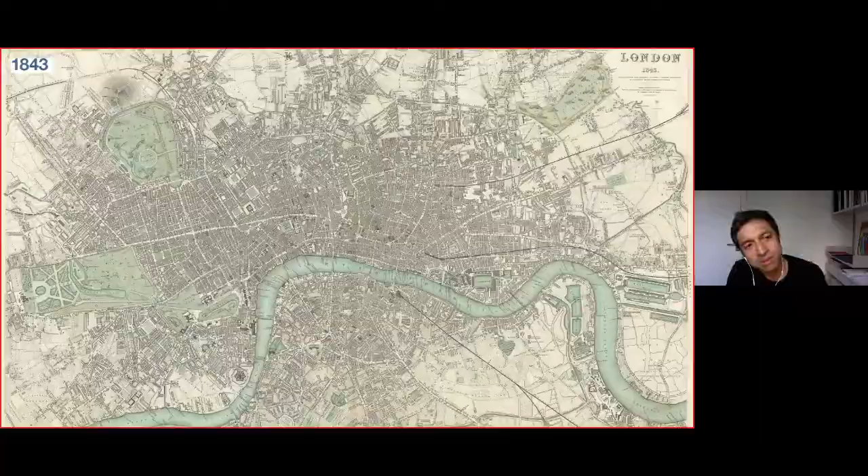Next slide. And historically, London's sewers were essentially rivers that existed in London, which were built over. And there was a network of sewers that would run all the way to the Thames. And essentially what was happening was that all the sewage was then dumped into the River Thames. And the Thames isn't actually a river, it's an estuary, which is double tidal. But it got to the point where even the Thames couldn't really take that amount of sewage based on the growth of the city. Next slide.

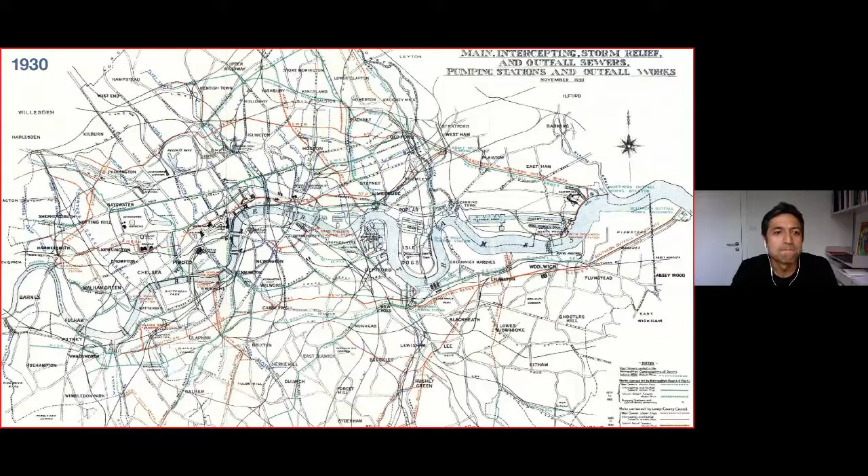And that was when the Great Stink, this was in July 1858, and this is when the Parliament, I think, realised that the stench within the Thames outside Westminster was so unbearable that they commissioned the Thames sewer, the original Thames sewer. Next slide.

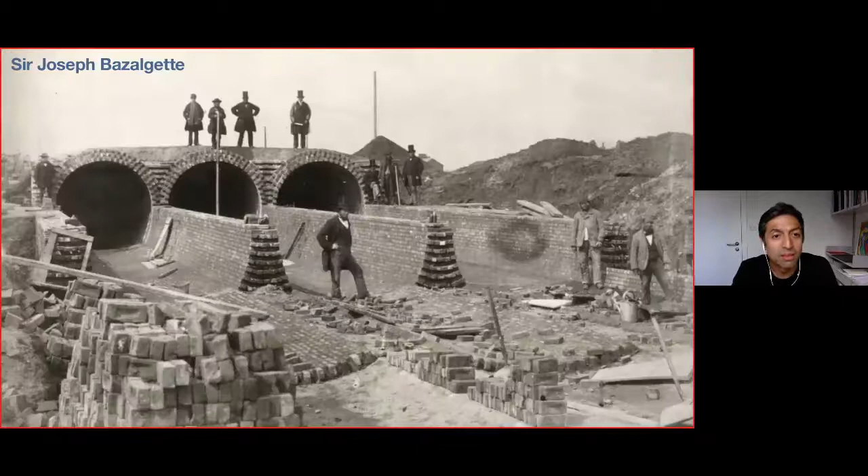And this was Bazalgette. Bazalgette's there in the foreground, and he's doing that stance that all the engineers of that era did at the time, Brunel as well. And these were some of the tunnel profiles that he designed and developed, which were some of the first of their kind. If you go to the next slide.

And what they did was, at the time, the engineers actually designed not just round circular sections, but also ovoids and arches. And that was to increase the flow of sewage and effluent within those profiles. And they were the first of their kind. And so what is beneath our feet is a matrix of various profiles that have been engineered over 170 years ago to enable the flows to be maximized.

And you can see the section at the bottom, which is the Victoria Embankment, which is where he built not only the underground, but also the sewage system, as well as a service area for gas and electric mains. So whilst the embankment was being created and land was being taken and reclaimed from the River Thames, there was this sort of combined infrastructure utility that was being integrated. Next slide.

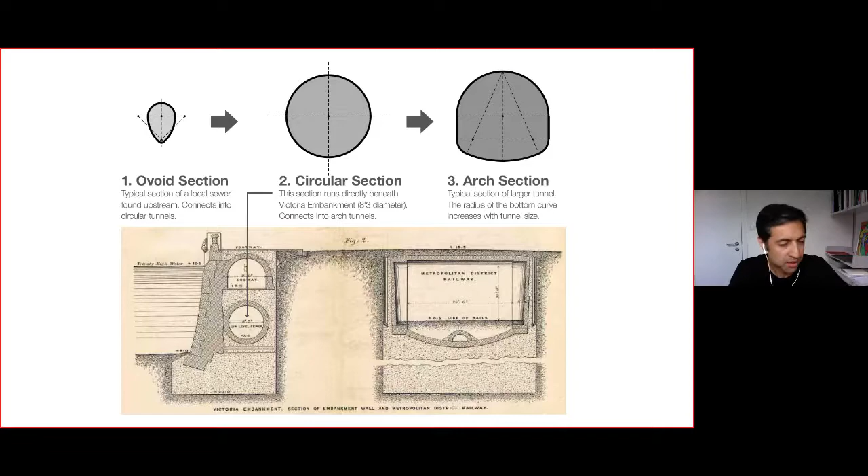Well, currently the problem is this. Each week, 300 untreated Olympic swimming pools overflow into the River Thames. And the reason is that not only have you got an increased population, but we're building on what is essentially porous ground. So when you have the rains like we did today, followed by everybody in London flushing the toilet 2-3 times a day, it overflows a system that Bazalgette designed. And where does it flow into? It flows into the Thames.

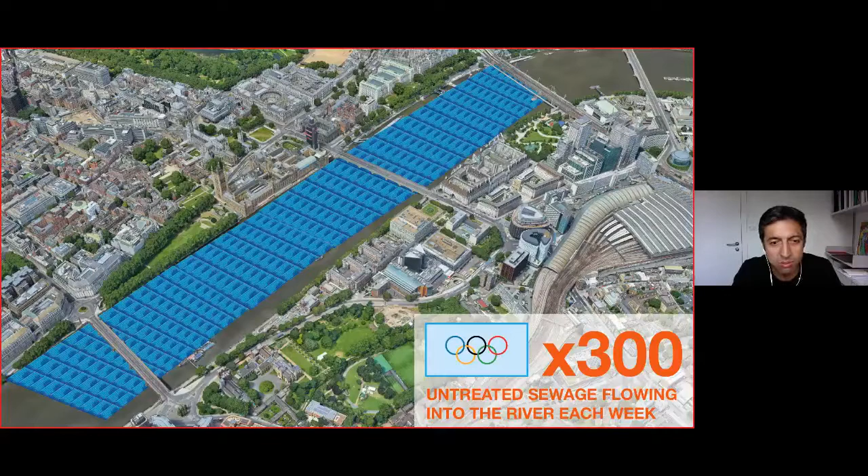So the plan is to now capture that before it gets into the Thames. And when the Thames Tideway is complete in a few years' time, it will only overflow several times a year, making the Thames one of the cleanest rivers, estuaries in Europe. Next slide. So the solution, next slide.

So this is a really simple diagram. So you can see the house there. So when you flush your toilet, it goes into a combined sewer with the surface water. So that's the water that is shed both from the streets and from the roofs. And that goes into a pipe which usually runs down your main road, which then runs into the sewer, which is the Bazalgette sewer. That's the large one that's just underneath the car. And that used to overflow straight into the River Thames.

What we're doing now is we're building shafts which capture that overflow. And then there's a tunnel that runs all the way underneath the Thames, which is a 7-meter diameter tunnel. And that will prevent, when there is demand on the system, overflow into the Thames. Next slide.

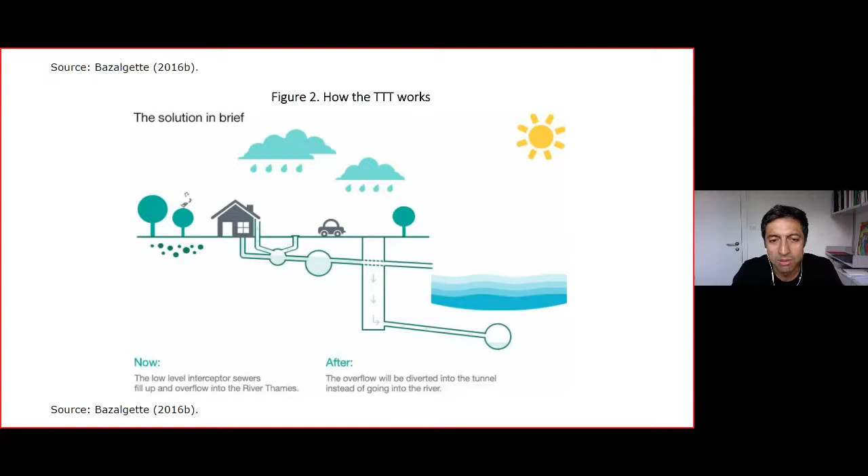And this is what's being created at the moment. Just like with Crossrail, there's a BBC documentary regarding building of the Thames Tideway. So this is very much a combined effort between engineers and contractors, and there's some heroic civil engineering currently being constructed. And the typical diameter of a shaft is 30 meters wide, which then feeds into a 7-meter sewer. Next slide.

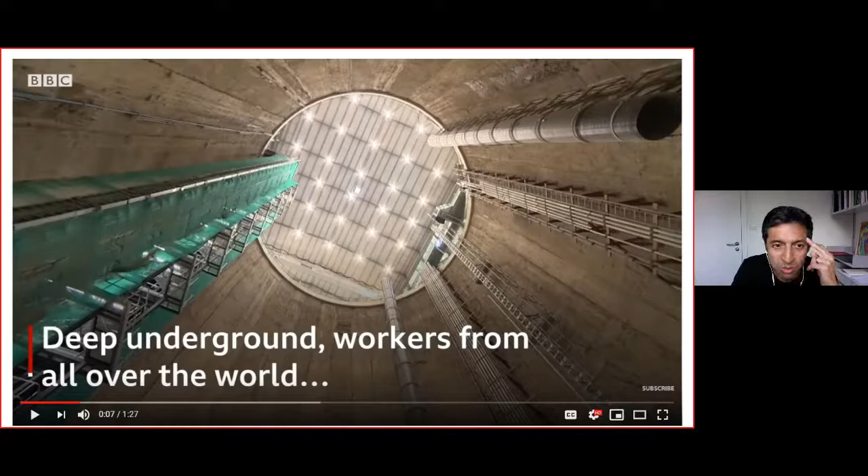And it's gravity. So essentially from Ealing, you've got a 30-meter drop and it runs all the way to a 66-meter drop. And what the engineers are currently doing is tunneling away, and they're building these shafts through a combination of London clay, sand and chalk. But essentially it just flows from west to east. Next slide.

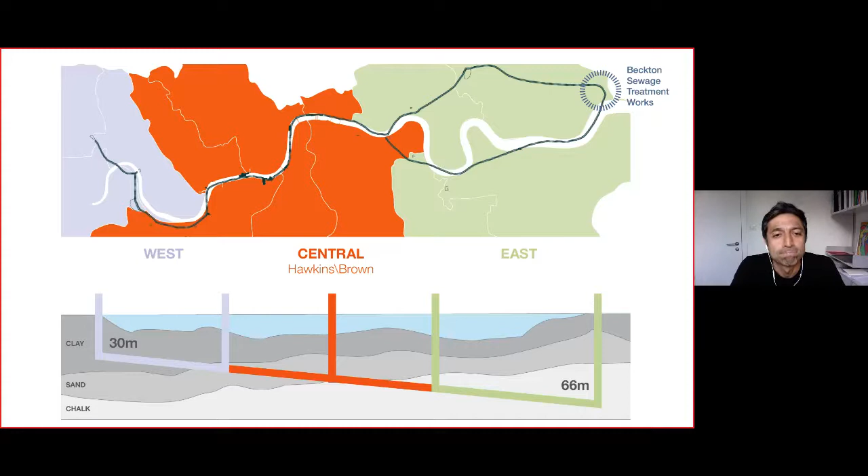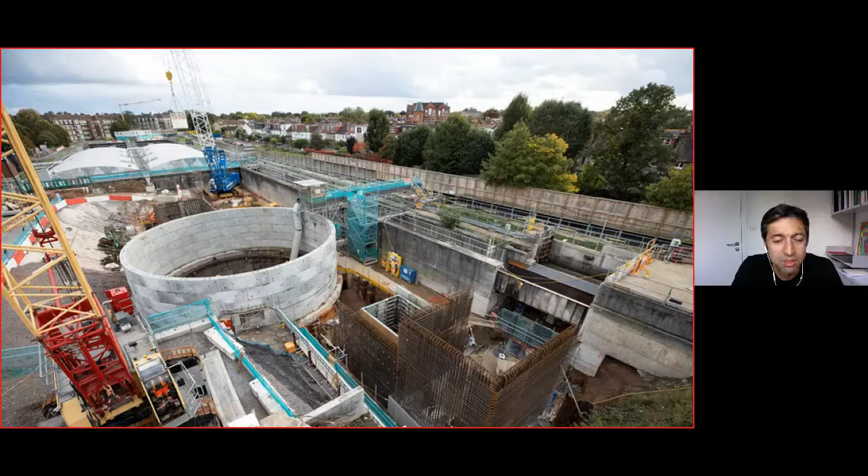And this is the first shaft in Acton, which exists just off the Uxbridge Road. This is where it all starts. So all the surface water, all the sewage from the area gets captured here, stored, and then it flows down. So there's a shaft there, which is typically probably 30 meters deep, and then that runs all the way towards the east. Next slide.

And I was going to talk about one particular, because what they did was that they split the whole of the Tideway project into 3. And what they did in the first instance was do what was known as a development consent order, which essentially is almost like an outline scheme. It's basically setting the form and the location of these sites. And then we were commissioned to develop the designs for construction across the central section. And the central section has 8 sites within 5 different London boroughs.

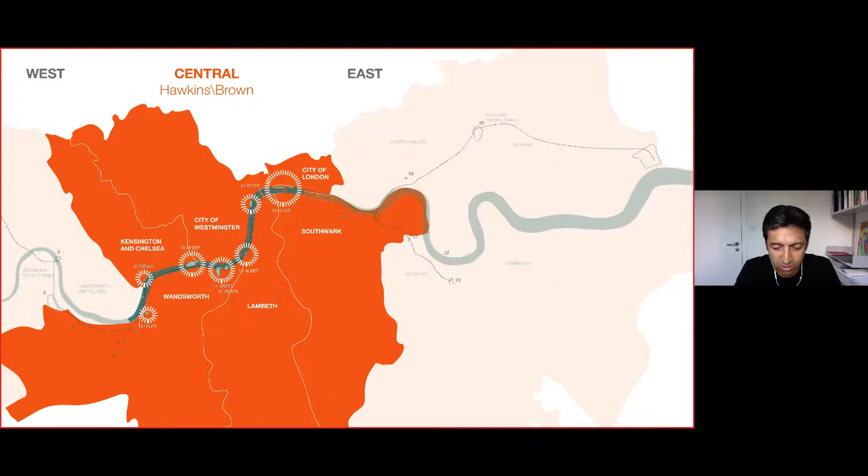And our challenge was to design a site located within the Thames in all these different boroughs with all the different characteristics, submit that, deliver that through planning, as well as developing design that is coordinated with marine engineers, contractors, and a whole raft of multi-stakeholders. Next slide.

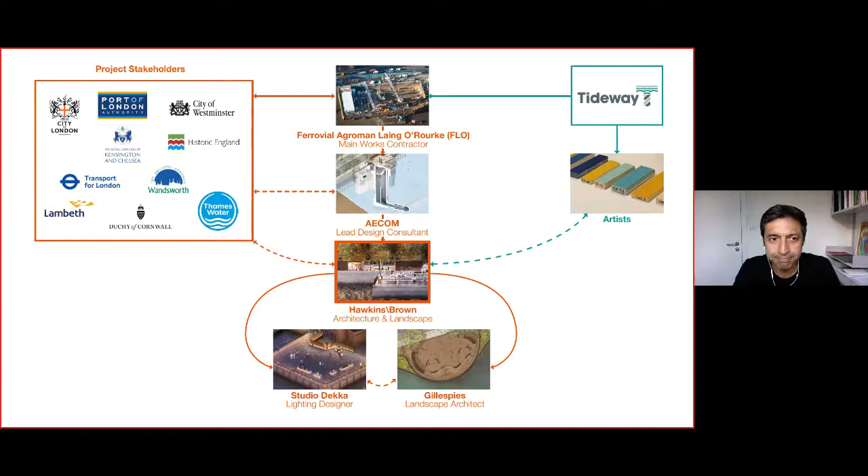And so for anybody who is interested in what it takes to build one of these mega projects, there's a whole team. So it's never designed by one person. For the central section, there's contractor Ferrovial Laing O'Rourke, who's our joint venture. The design engineers are Aecom, we're the lead architects. And then we have Gillespies as landscape architects, and we have a lighting designer, Studio Dekka. But you can see on the left, the project stakeholders, there are many. So it's all the local authorities, as well as the Port of London Authority. And Thames Water are ultimately the client. Next slide.

And we were charged, because we were putting this piece of infrastructure in the Thames, to effectively give it over to the public as a piece of public realm. And so we measured the structures, the public land that we were putting in the Thames. And in the dark orange is that public realm. And you can see in the green, that's Trafalgar Square. So it's quite a considerable amount of new public realm that is being created. Next slide.

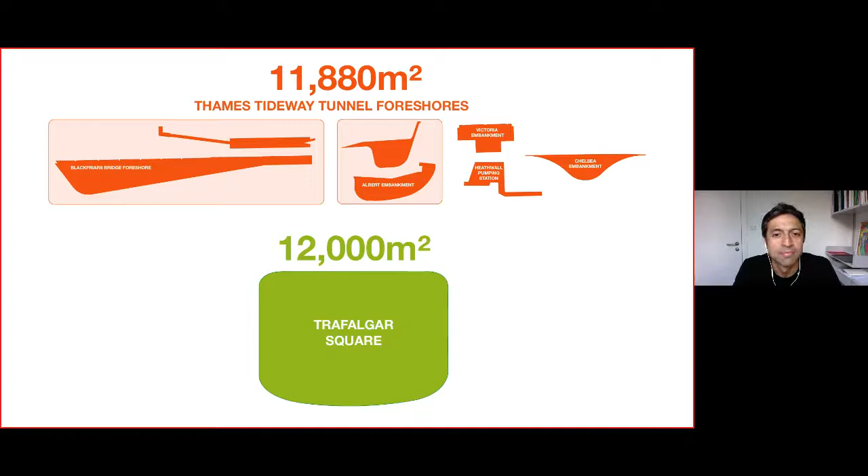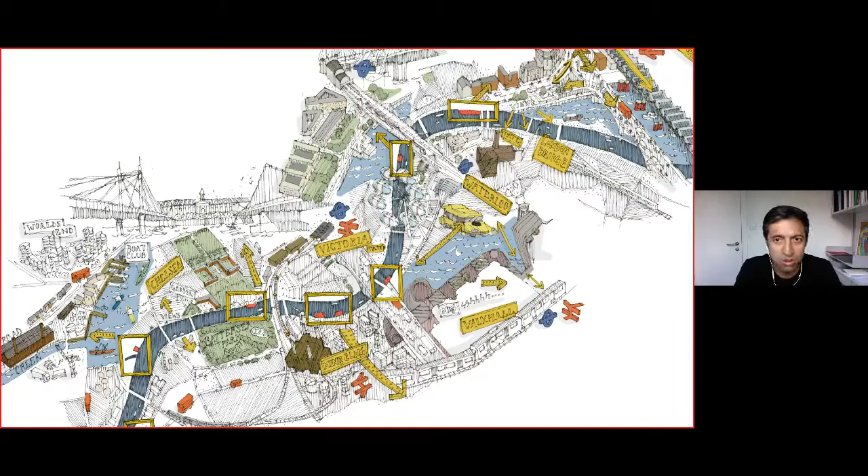And then the first thing that we did was we realised that the Thames has such a rich history. We actually started exploring the different villages which the Thames passed through and what the character was of those areas. And one of the requirements for the project was for us to collaborate with an artist on some in situ artwork for each of the pieces, which we'll be discussing later. So this was really fascinating, unearthing some of the rich history in the various boroughs and what the river was actually used for over so many centuries. Next slide.

And this is a section through what is currently being constructed in the Thames. On the right-hand side there, you see the tube, which is what Bazalgette constructed way back in the 1860s. And then you can see that little semicircle at the top. The semicircle at the top, the small ones, that's the Bazalgette structure underneath the embankment. And what we are currently doing is building that 13-metre shaft, which then feeds into that 7-metre tunnel, which then winds through underneath the River Thames.

And what it does is it picks up the overflow, and then it acts like a little cyclone, and it actually creates a vortex for the water to flow down into the tunnel. And the reason why it does is if you allowed the water just to flow over without the vortex, it would actually eventually crack and crush the concrete below based on the drop. And if you go to the next slide.

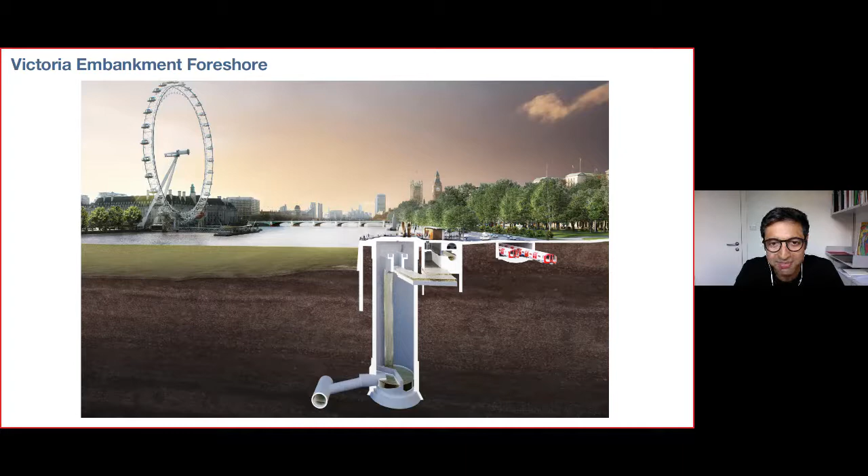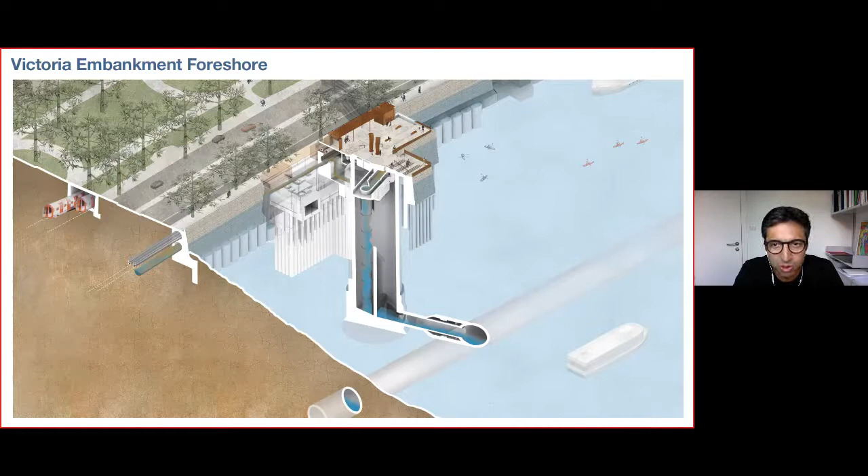And this is what we really had to work with. So underneath the public realm is a whole labyrinth of tunnels and pumps and chambers. And one of the big challenges is the marine civil engineering that is required, because you're creating this whilst you've got a live functioning river. And you've got a historic listed wall that you're creating this new piece of public realm attached to. Next slide.

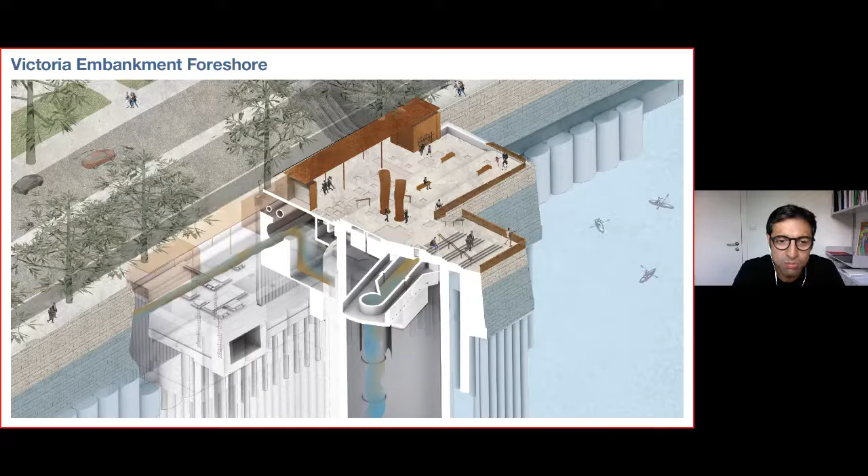And this is a zoomed in view, and you can see those small little chambers. All those chambers that you see, those little squares, those little manhole inspections, need to be serviced 24 hours a day. So our challenge was to create a piece of public realm which was fully accessible 24 hours a day, free to the public, as well as being able to create a space where you could maintain the kit below. Next slide.

Well, they are one of the vent shafts, and you probably may not have noticed them, but actually Bazalgette created lots of little vent shafts from the 1860s, and what they do is allow for air from the sewage system to be dispelled high up into the air. And those vent shafts are internally dressed in carbon. That neutralizes the odors, and that form is generated by the vortex that is created when the water falls into one of the shafts. That's what's generated that form. And here in Westminster, it's going to be cast bronze. Next slide.

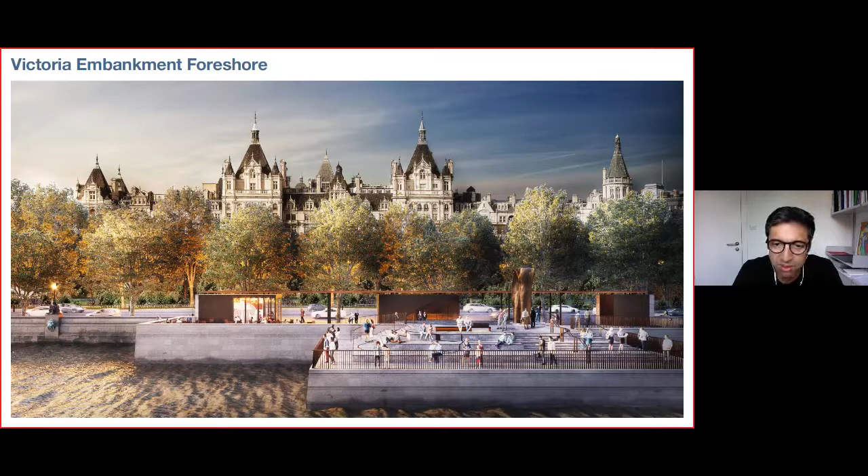And when we designed the pavilions here, because we realized that this was almost like a homage to Bazalgette, we really wanted to celebrate the engineering that he had achieved. And we realized that all of his beautiful tunnels that he had designed were under your feet. You can never see them because you can never access them. So what we did was that we took the sections to scale and we etched them onto the side of the bronze, and you can see them.

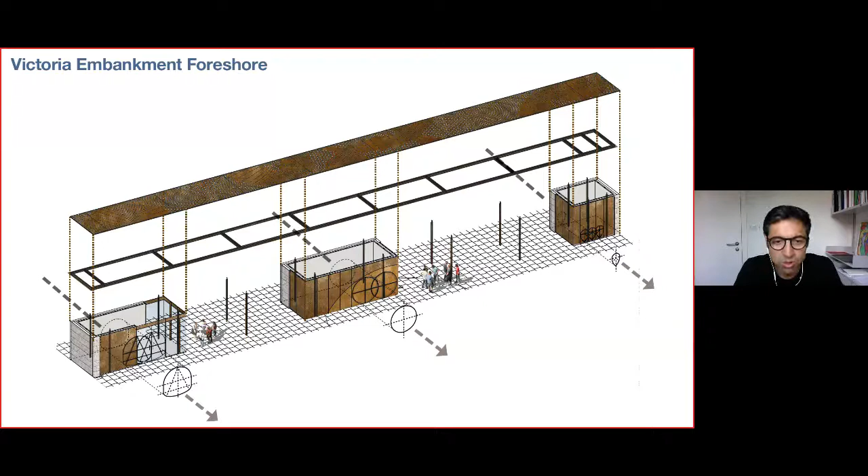You can see the rather bulbous one on the left, and then you've got the circular section, and then you've got the small oval sections on the other ones. And we were very keen for people visiting this site to understand the engineering, the civil engineering that was hidden away beneath their feet. Next slide.

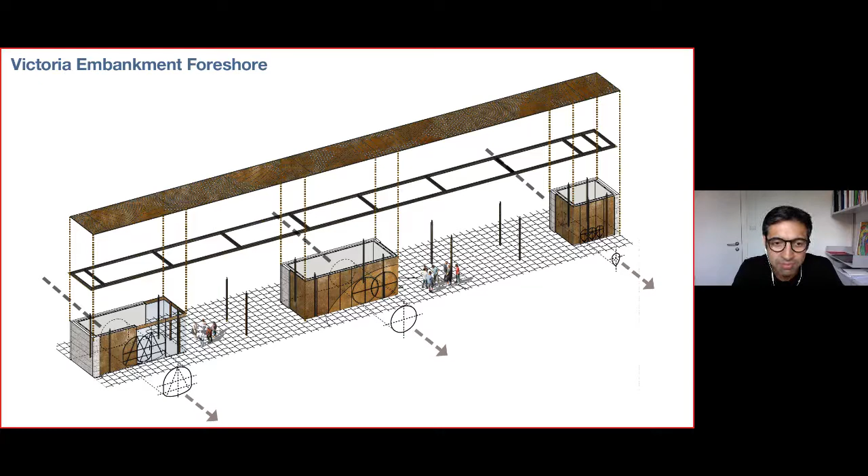And then we wanted to overlay that with the new engineering that we've created for the Thames Tideway project, which again will never be seen because it'll be covered up. And so that large circle in the middle is the 13-metre diameter shaft that the Bazalgette sewer flows into, and the smaller section that you see on the steps is the 7-metre tunnel.

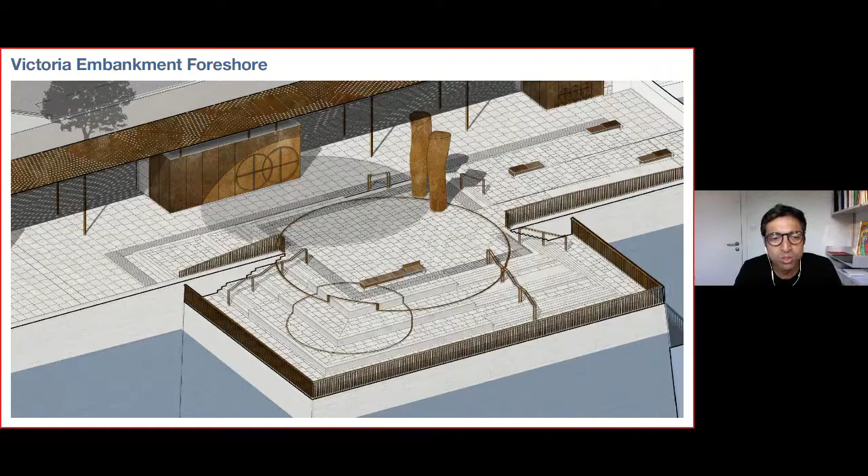So we wanted to overlay and show the old civil engineering, the old tunnel sewage system that was designed for 4 million people, and the new sewage system that is designed for London, which in 10 years' time will be 11.5 million. Next slide.

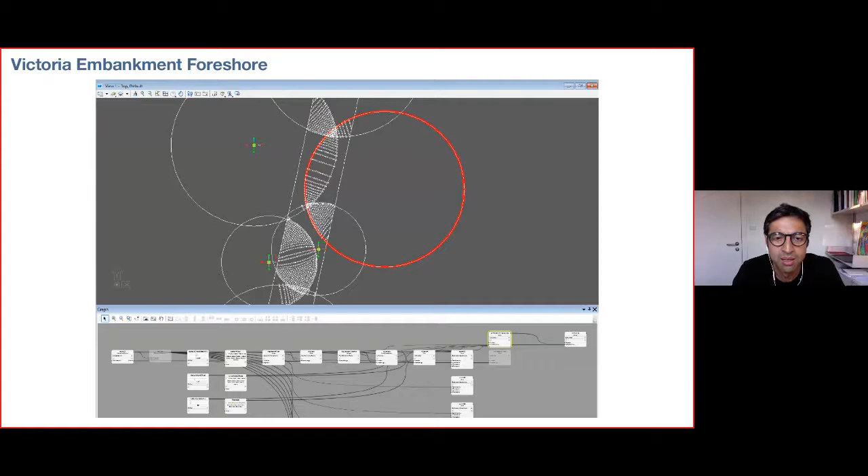And then we were able to do a lot of these geometries because we're using lots of great digital equipment. And so this is us overlaying the 13-metre with the 7-metre tunnel. The reason why we did that using specialist software, if you go to the next slide, is to create an array of perforations, if you go to the next slide, which are digitally cut into a canopy, which is the threshold that you cross when you go from the streets of Westminster into the public realm, which creates this array of light on the floor. Next slide.

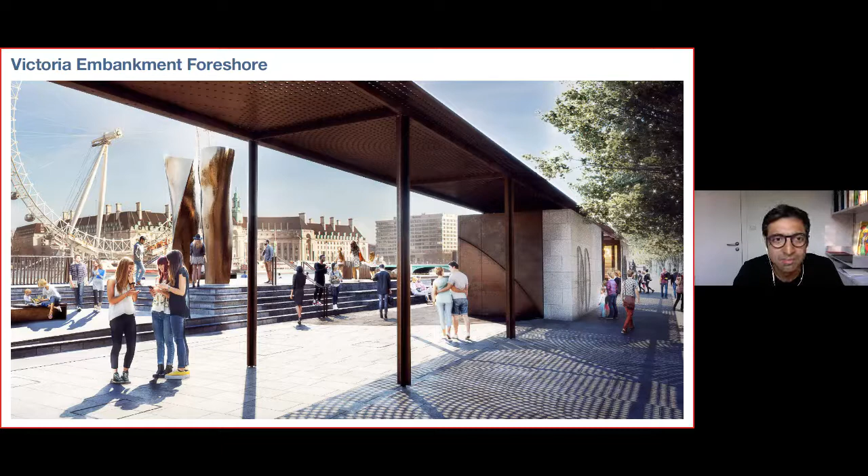And then this is the view from the street. And even on the granite sets that we have, we've carved out the profile. So even if you don't go onto the public realm, you get clues of the infrastructure that was created below. Next slide.

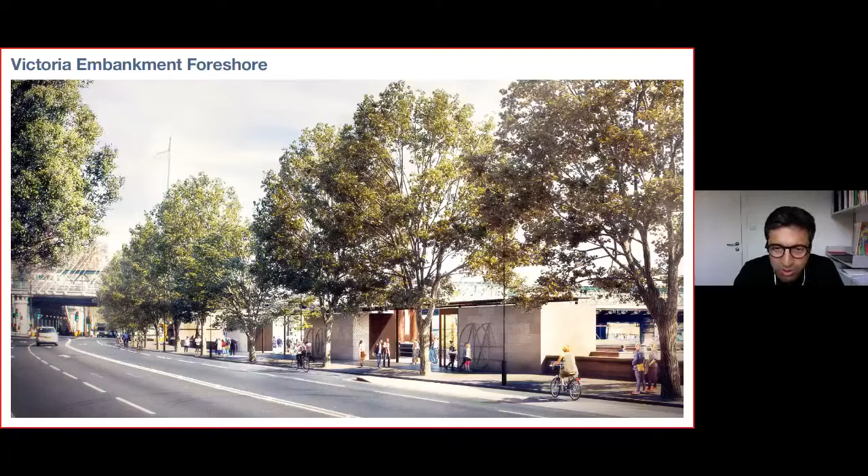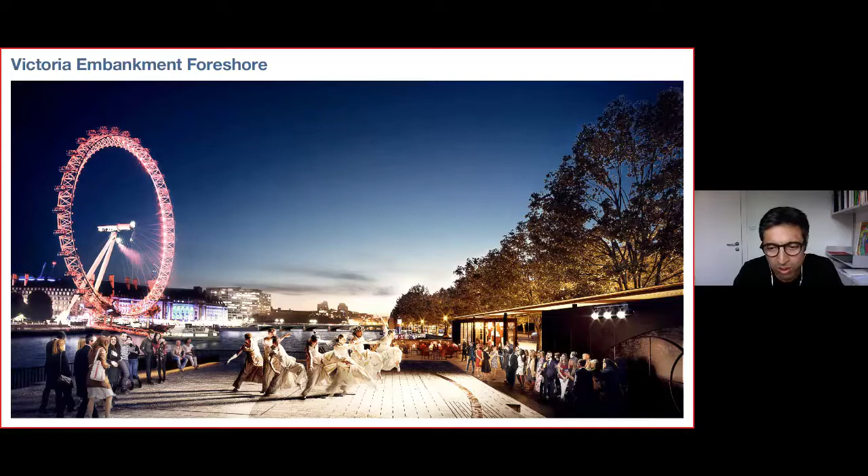And then in the evenings, we sense this will be a great platform in the Thames where you can have events. You can imagine New Year's Eve here. It'll be a great spot when the Millennium Wheel is all lit up with fireworks. Next slide.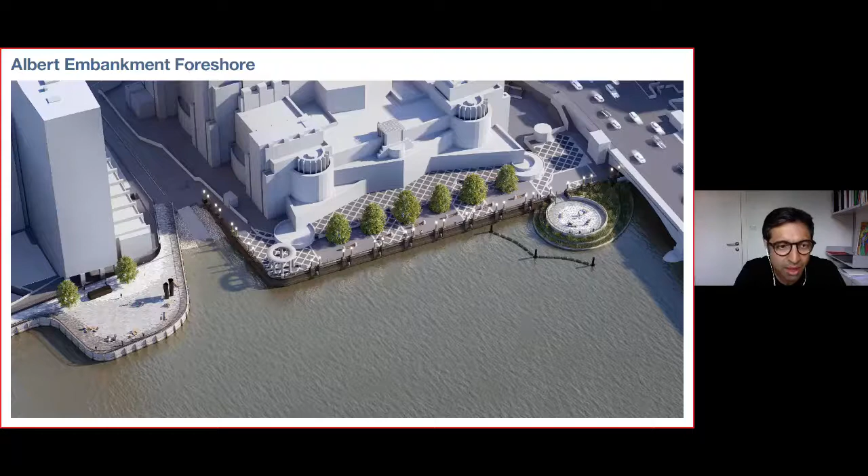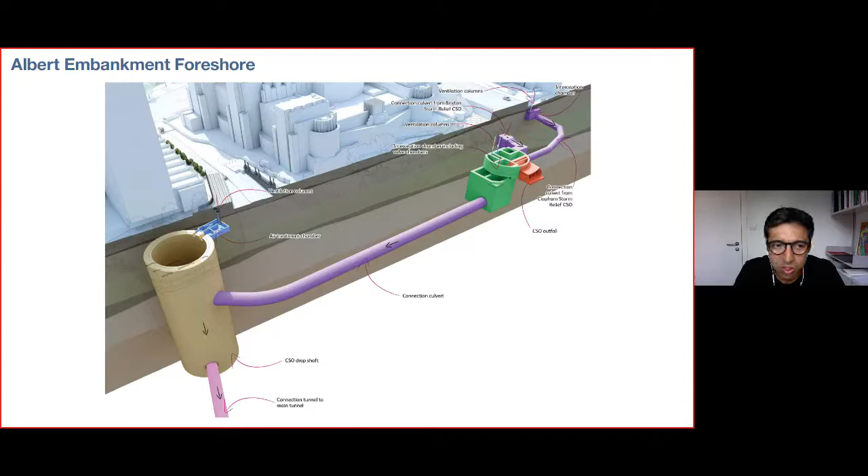For some of you who probably dared to use it, do you remember the duck tours where you used to have that little yellow boat that would take you for tours? Well, that ramp that you see on the left-hand side, that is where the duck tours used to enter the River Thames. And if you go to the next slide, underneath those two pieces of public realm is more civil engineering, where we're actually connecting an old river, a historic river, which flows into the Green Chamber and then into the main shaft. If you go to the next slide.

And this is the River Effra. So this is one of the existing rivers that was bricked over by Bazalgette. So that's what the sewers look like. They're still very much operational. These were rivers that were then built over that actually take a lot of the sewage from South London through into the Thames. And so what we're doing is we're capturing this sewage before it goes into the Thames. Next slide.

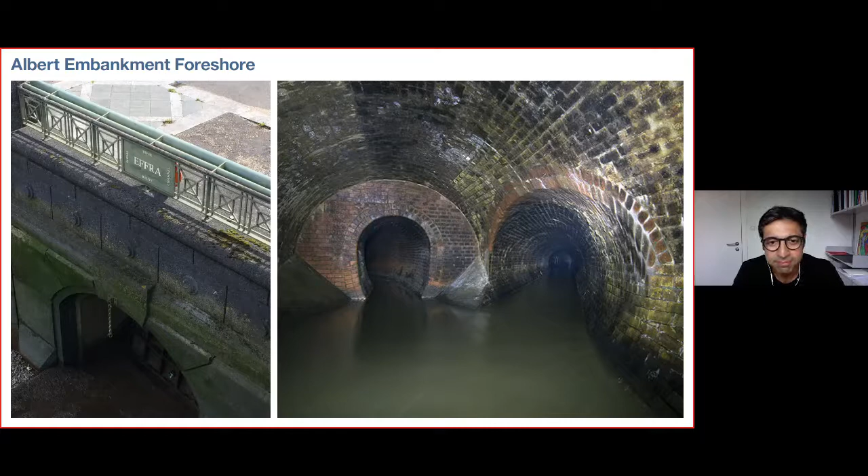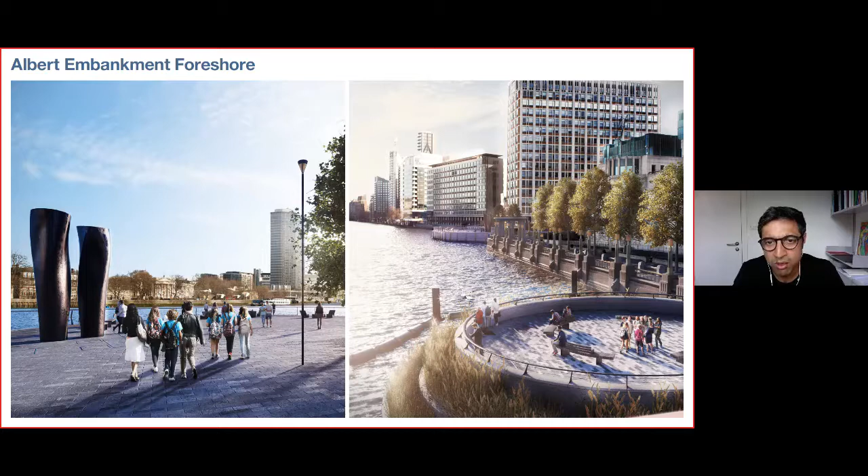And then this is the public realm that we're creating. So you've got two areas. One which is a circular public realm, which has plants. We were just very keen to have some greenery in this public realm, which is a real challenge when you're doing heavy civil engineering. But other areas where it creates a route along the South Bank to tie up the pedestrian realm along the Thames. Next slide.

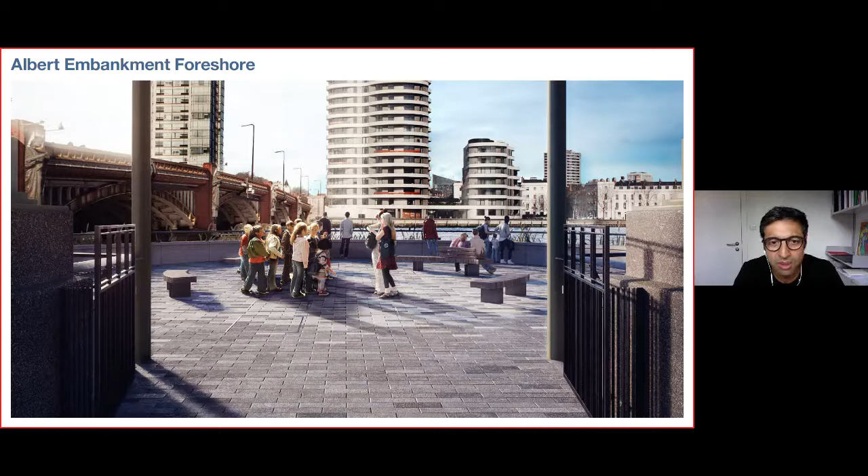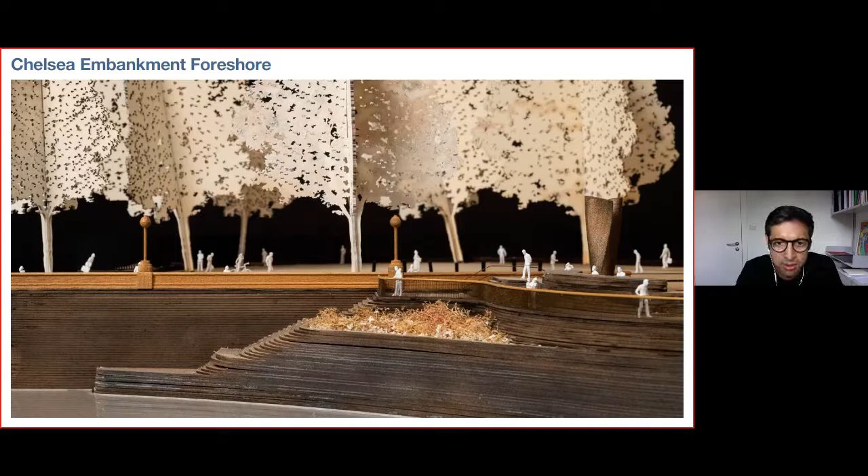And these are the tidal terraces. So like I was saying, we were very keen where we could to try and get as much ecology into the public realm as possible. And planting trees is always a challenge, because you've got so much engineering that exists below. It's very difficult for trees to survive. However, the tidal terraces were a great opportunity for us to bring in lots of different species. Next slide.

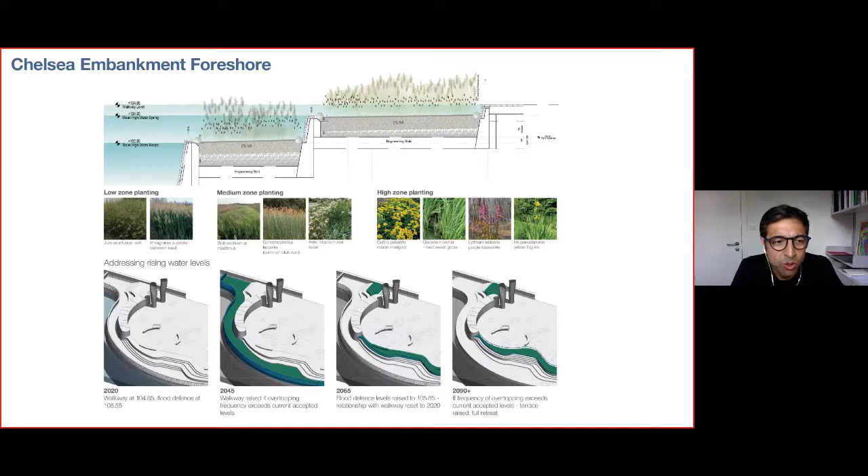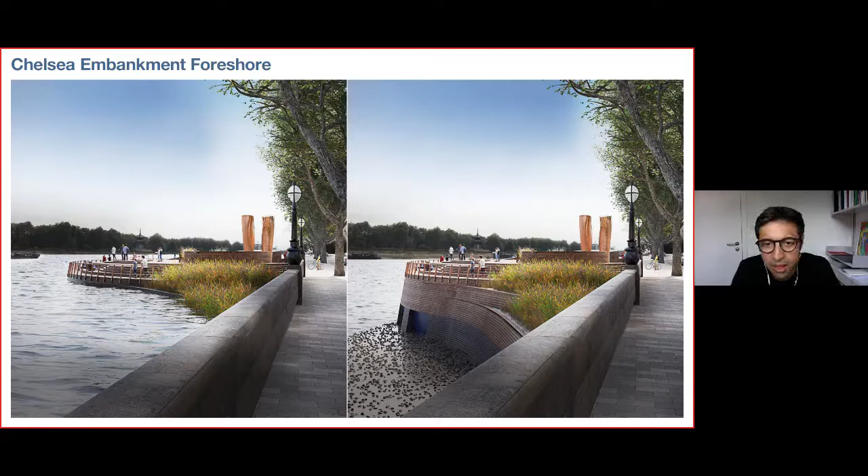And this is a technology that was really pinched from the aviation industry 30 years ago, which then made it to the automotive industry. And for the past 15 years in construction, we are now designing and building in this way. And all the big major projects, or public sector projects, are constructed in this environment, essentially Minecraft for grown-ups. Next slide.

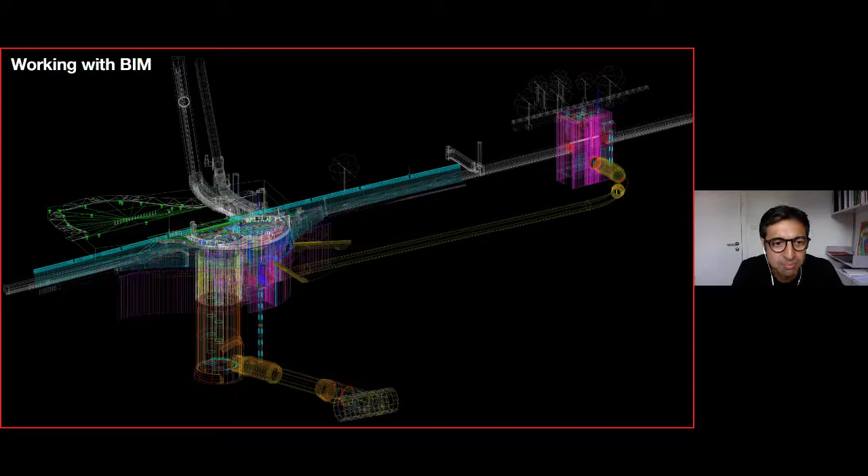And so this is the existing Bazalgette wall. So that was all surveyed and modelled, so we understood what we were really working with. Next slide. And then overlaid on that was the civil engineering. So these were the piles, the big heavy concrete and the shafts and the tunnels. Next slide. And then you've got the marine engineering, which is the piles, essentially the fortification, so that should any boats hit the structure, they couldn't affect the operations of the kit beyond. Next slide.

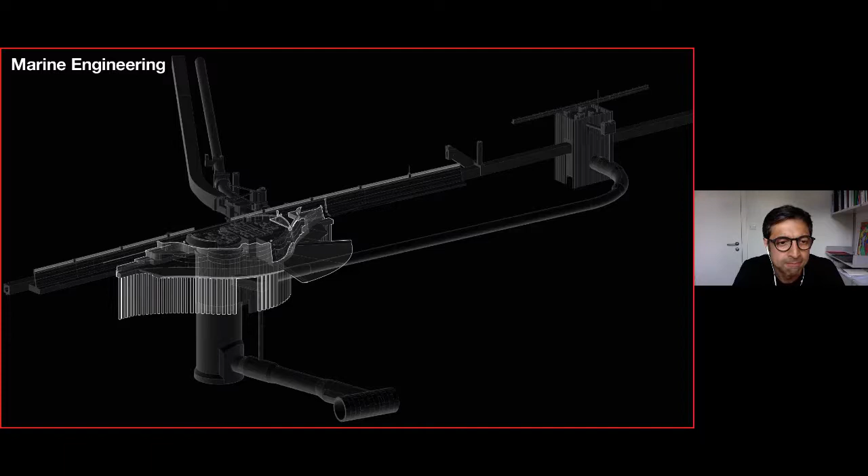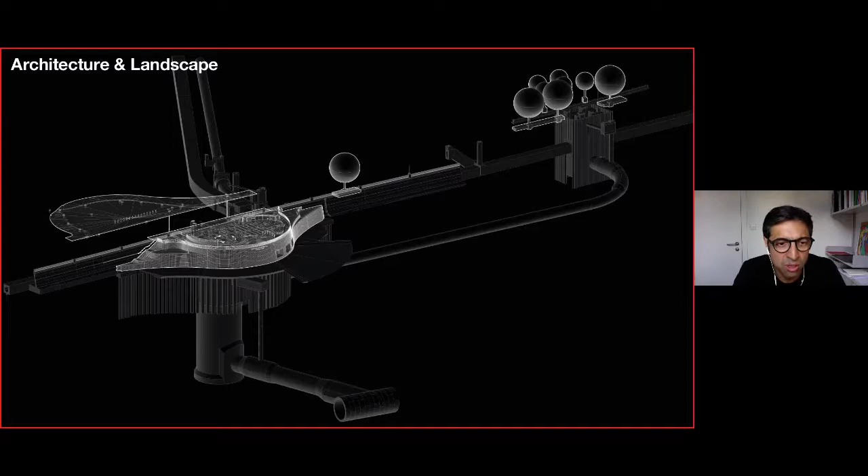And then what you have is the service engineering, which is effectively the plumbing. It's the plumbing that sits within the structure that is keeping the foul and all the material moving. Next slide. And then finally, you have the architecture and the landscape. And I suppose this is the area that we've been developing, which is, well, how do you dress all of that civil engineering and create a public realm? Next slide. And if you go to the next slide.

And this was just really an image showing our challenge. This is an aerial view, a plan of the Chelsea site, and all those squares and all those chambers in there. Well, each one of those, just like Victoria, just like all the other sites, needs to be fully operational, fully accessible 24/7. All of those manholes you've got to be able to open and inspect. And our challenge was, well, actually, how do you make that beautiful?

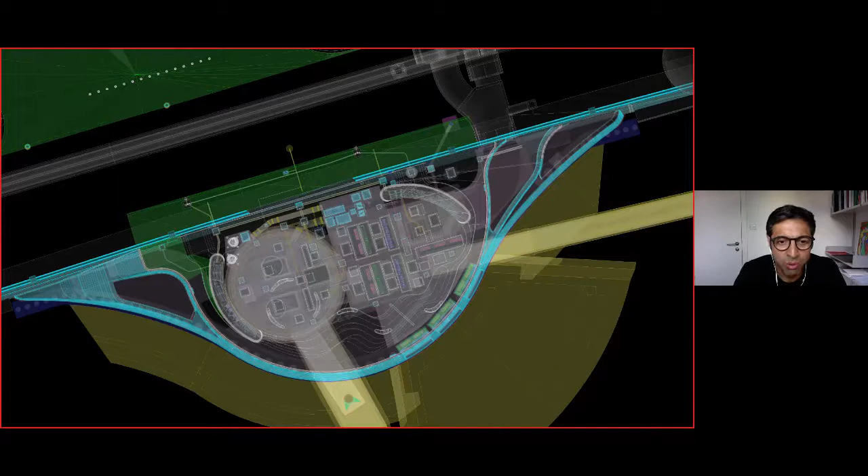And so, next slide. We worked tirelessly using brick. And what we were proposing to do is to set brick within manhole covers. And so there will almost be this tapestry, this weave across the whole landscape. Next slide.

And these are some of the geometries. A lot of this was inspired by some of the brickwork that Bazalgette had used for the brick wall as well as the tunnels. This was our contemporary take on it. These are surfaces that you'll be walking on and sitting on. Very robust, but again, we had to spend a lot of time detailing to make sure that they will last as long as the Bazalgette wall and structures. Next slide.

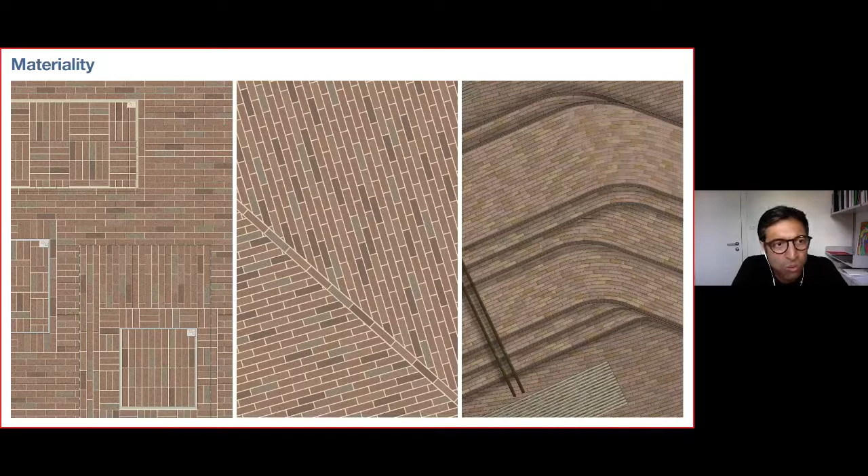Okay, now as I said before, we were asked to collaborate with artists, and we were very keen for there to be another creative voice in looking at the Thames, and also maybe telling the story about the Thames. Next slide. So this is the first artist we worked with, Florian, who was working with us on Chelsea, and he was very interested in the way that the river wall has been eroded over time.

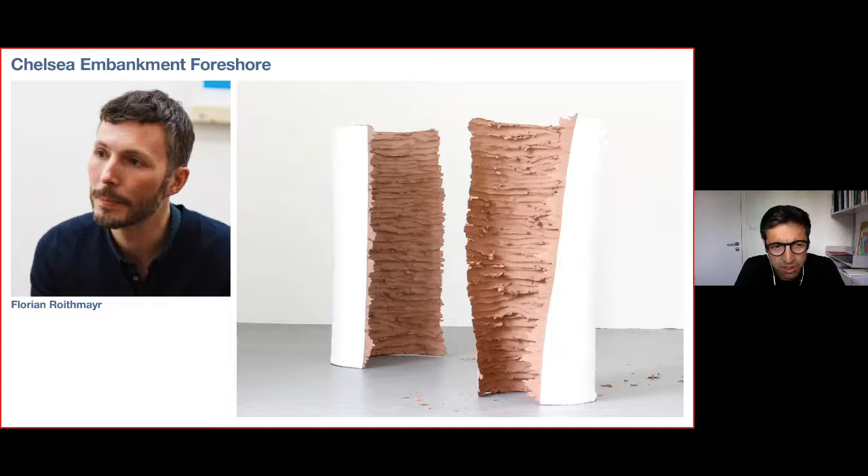If you go to the next slide, what he was proposing was to set different coloured bricks with different glazes, which would almost become like strata, which would reveal themselves with the river, the high tide and low tide, and over time they would age, but it would be a glazed brick, so it feels as though it's almost like the clay or the sand that's actually come from the river that's created it. Go to the next slide.

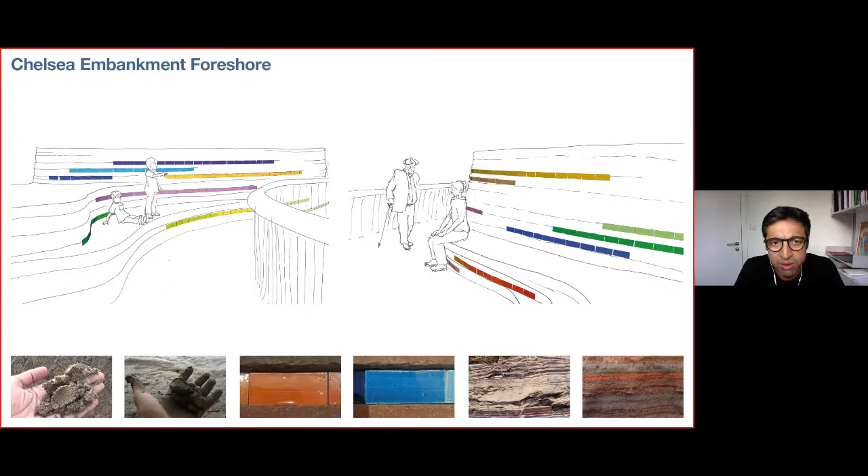And here are some of the samples that we were reviewing that are going to be set into the brickwork that slowly reveal themselves, and so when they're wet and the sun catches them, you get a sort of a glimpse, and they will shimmer across the structure. Next slide.

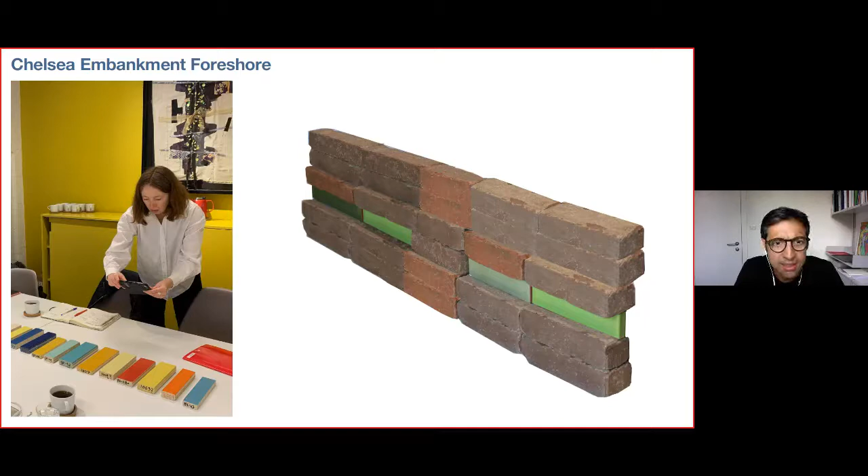And here it is. This is almost at high tide, where you can actually just get a glimpse as the sun moves around, and you're able to touch the glazed brick as well. Next slide.

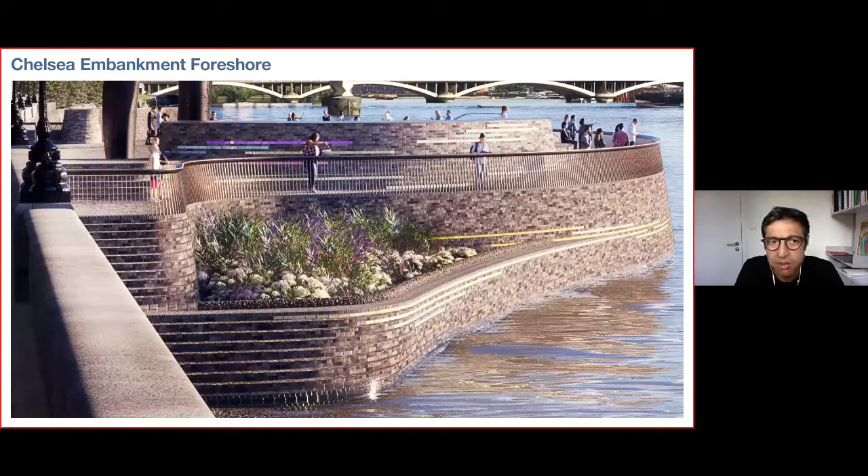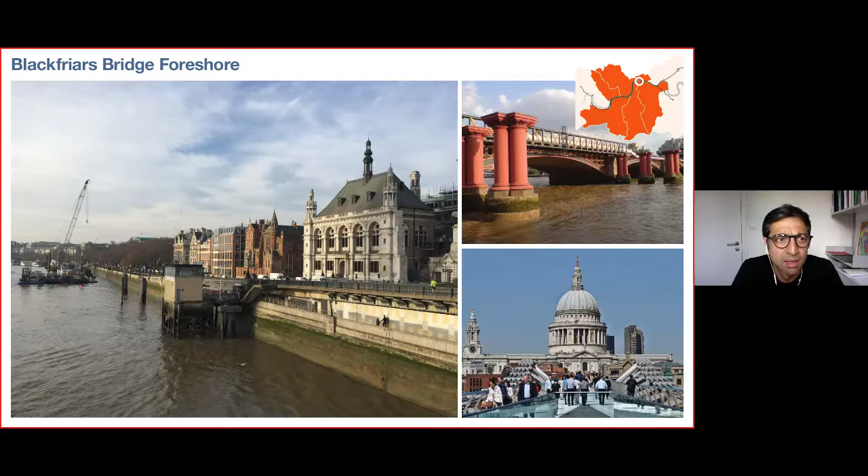And then finally, this is the site, which is our largest site. This is Blackfriars. It's actually located in the City of London, and here we're actually creating a piece of public realm which is 1,000 square meters. If you go to the next slide. And there it is. And so it's one of the largest pieces of open public realm in the city.

And here this was a real challenge in the sense that it was so big. We were very keen to break it up into different spaces where you could have large gathering spaces in which you could retreat for smaller intimate spaces, as well as it being a walkway along the north bank along the city. And you've got a small kiosk there, and then you've got viewing areas across the Thames. Next slide.

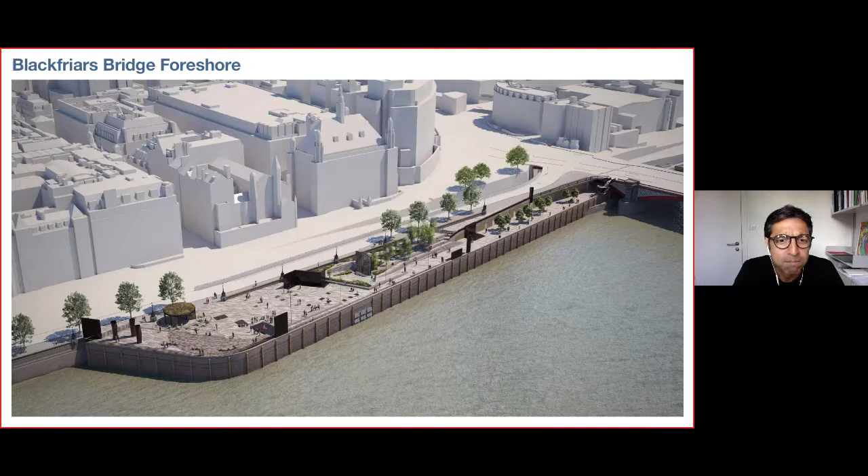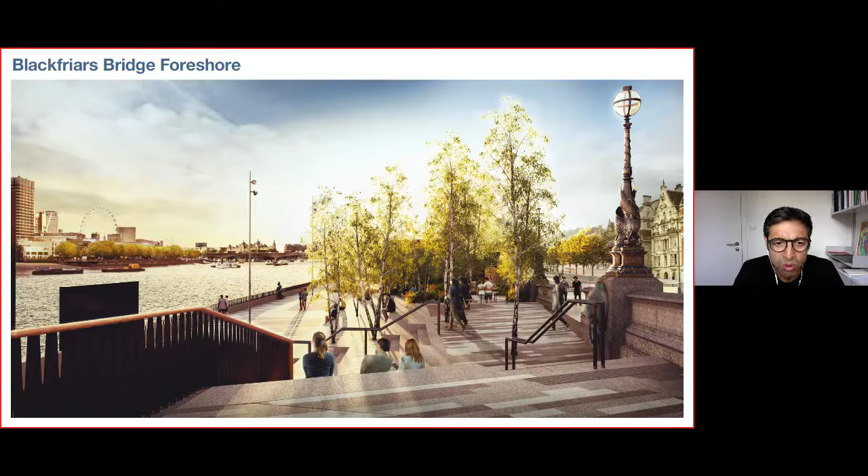And so these are some of the spaces that we're creating as the landscape falls away. Here we had a great opportunity because of the civil engineering below to actually plant trees and shrubs. But we were very keen to make sure that the space created different zones for different uses. Next slide. So these are some of the larger open spaces where you can have larger gatherings. Next slide.

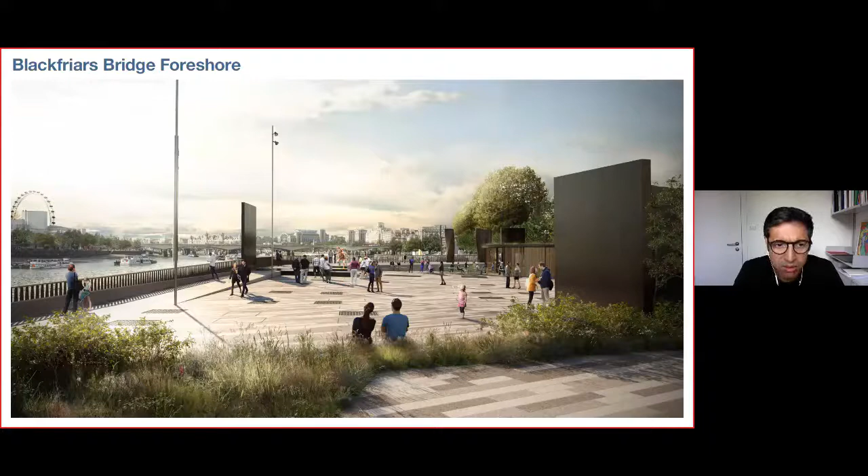And here we worked with an artist, a Glaswegian artist, Nathan Coley. This is one of his artworks, so you imagine what you desire. And he is famous for creating text-based, but generally in situ artwork within the public realm. Next slide.

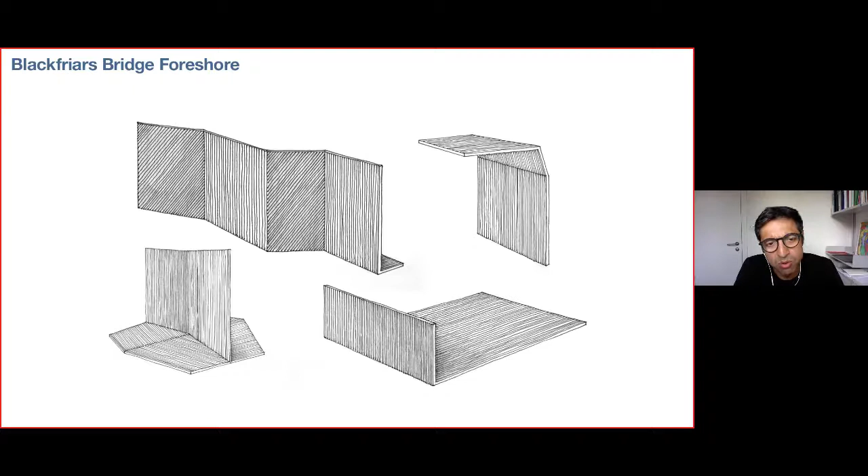And his approach to the site was that he was very keen that with a very open site like this, he wanted to frame the views that you would have of the river by creating stage sets. And the stage sets would be large, monumental black structures. And these are some of his sketches, folded planes that are embedded within the landscape. And with that, it was structures that you could engage with, but then it would set the view of the Thames from how you viewed the river. Next slide.

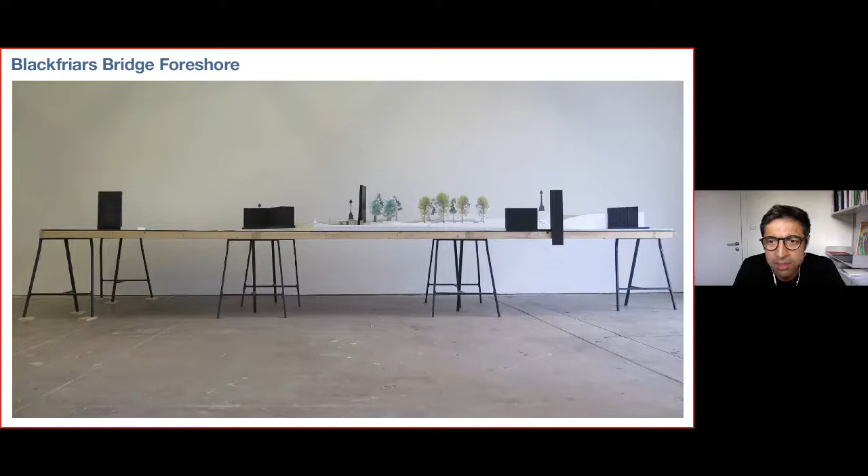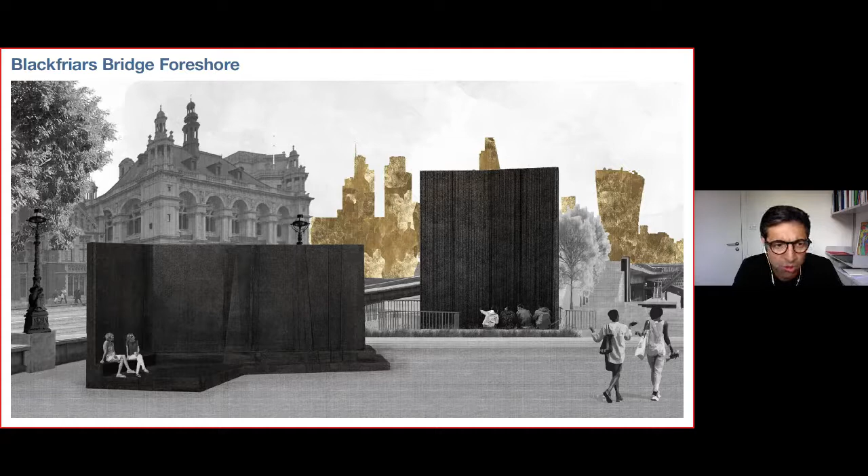And this is one of the views looking into the city. Always trying to maximize the amount of space that we have for people to sit and dwell and wait and enjoy the view. Next slide.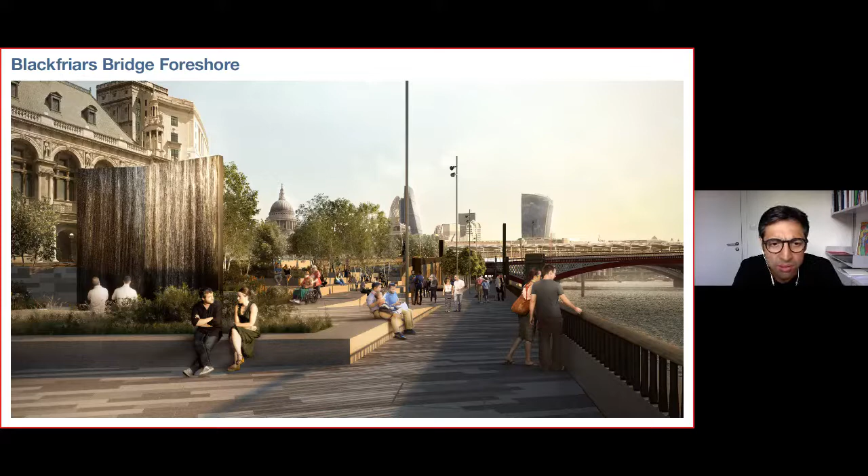And there's Nathan looking at some of the detailing. And this is a waterfall that we're creating. So water will be pouring down these ribs, in a way already animating the space. Next slide.

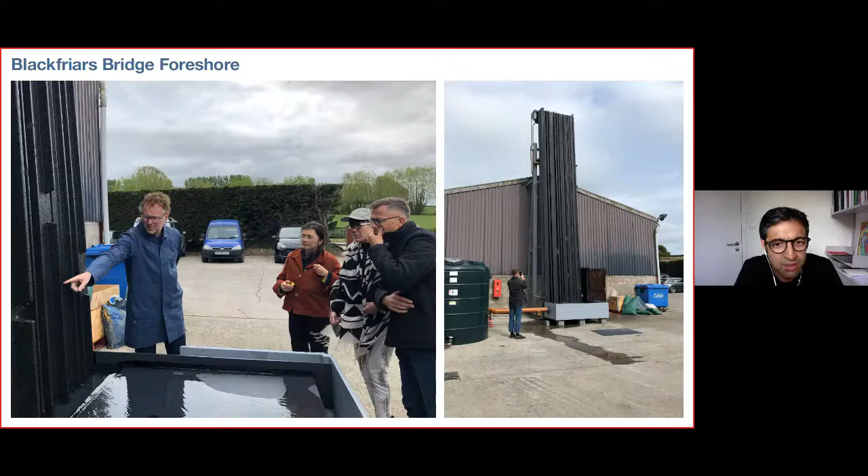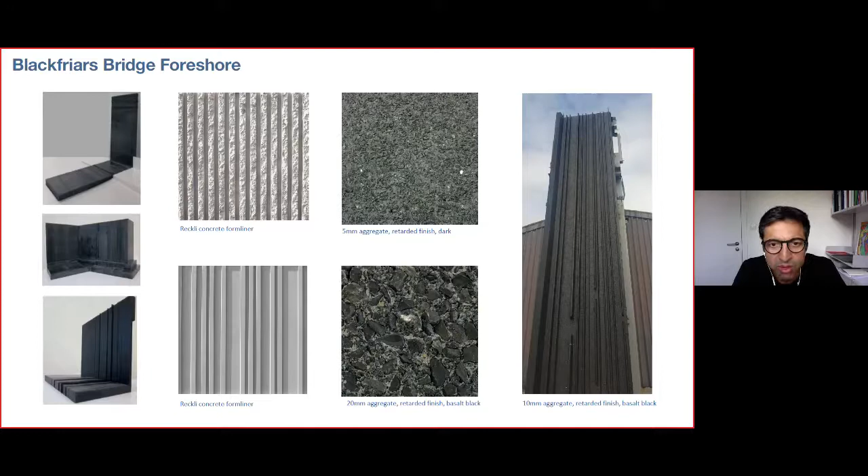And then these are some of the finishes that we're looking at. So all these structures here, these are precast structures that are being formed actually in Ireland, using reinforced concrete, basalt, and then being sort of polished and finished. Next slide.

So there's a huge journey that you have to go through with so many stakeholders. So for any budding engineers out there, 90% of the time you're actually communicating, which is probably one of the most important skills to have when you're in the construction industry. Next slide.

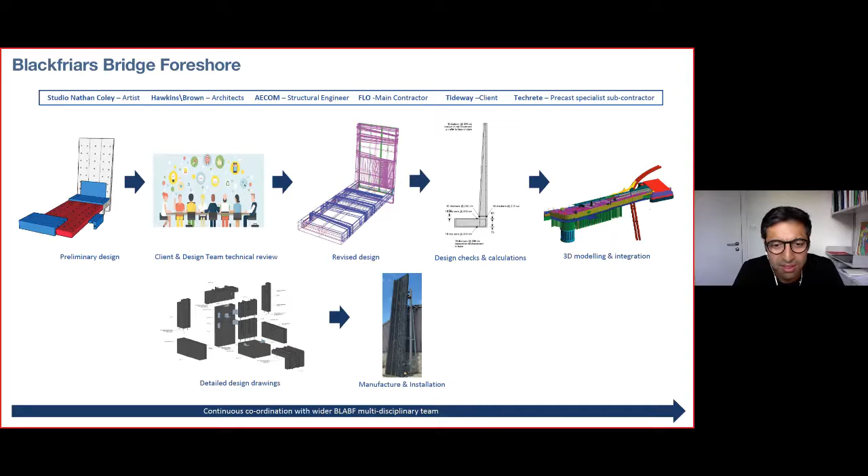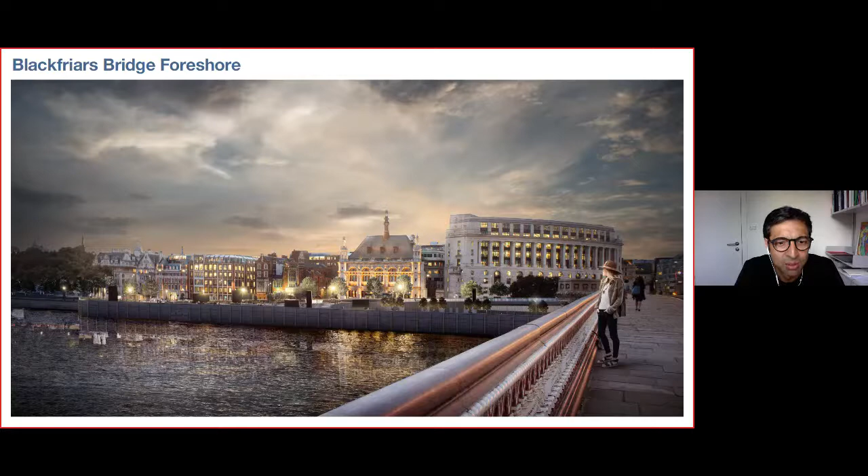Which is the final slide: hopefully we're creating structures which everybody will be able to engage with, as well as reminding you of the engineering that lies beneath your feet. Thank you very much. And I think that's my last slide. So any questions?

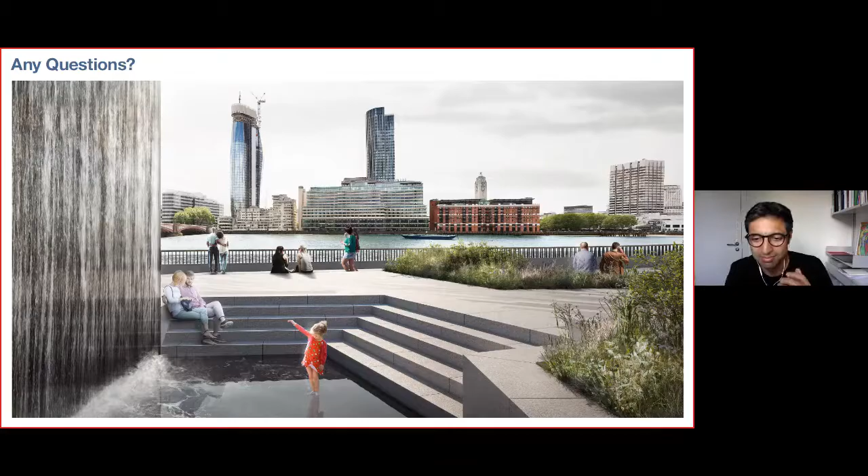Okay. Thank you, Harbinder. Thank you very much, Harbinder. That was absolutely fascinating. I really had not appreciated the size and the complexity of the project, and the unique challenges that's obviously presented. Seeing the designs for the public realm for the first time, I think when it's finished, it's going to be absolutely stunning. And I think it shows us how modern design can fit into and respond to existing architecture and the character of an area. You know, pick up on what's there, as you've said, and pick up on the heritage, in this case, some of Bazalgette's designs and so on. So I think it's going to be absolutely stunning.

Now, we've got quite a number of questions, so I will just go through them as they've come in. First question: when is this all due to be completed? I think the planned completion date, and I'm thinking about Crossrail, but I hate to ever give a date for when infrastructure projects are completed. But I think it's 3 years' time. The public realm will be open. But yes, it's about 3 years' time.

Okay, thank you. And we had a related question to this: how do you think the viability may be impacted by COVID-19? And how do you see this remaining valid for the next 50 years? Well, I think if anything, with COVID, it's going to be invaluable, because what we haven't got enough of in London is open public space. And if you look out the windows now in your morning routines, all the parks are full. I'm seeing people in parks that have never been together. There's families that have never spent any time together in the park. And so actually, by creating new public realm, especially in the city, where people can enjoy it, I just think it's going to be the norm.